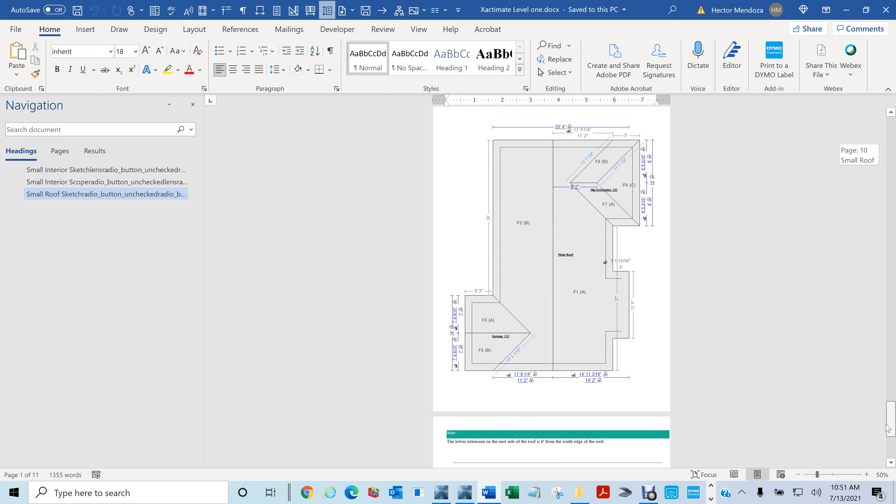when you're reading the documentation on how to do this, you're going to have this thing that looks like this. It's going to tell you what you need to do. Okay. It'll tell you to complete blah blah blah. It's going to tell you here's the initial main roof.

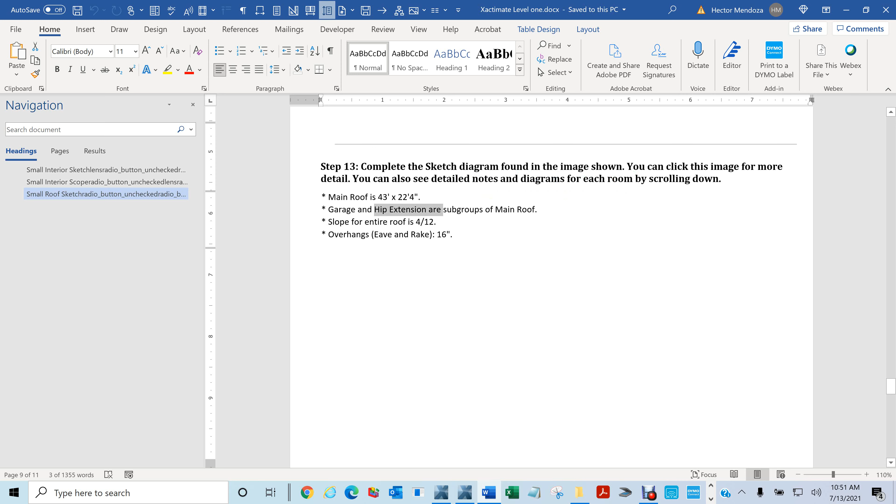It tells you that all the extensions and on your hips and your gables are all... it says that the garage and hip extensions are subgroups. It talks about all your slopes are 4/12 and your overhangs and eaves are 16. Okay, so now, let me show you.

So you're gonna go in and, I'll be slower because I'm not used to using pull downs, so I always have to find this stuff, which is probably gonna help you too. So go to Roof, go to Gable, and by the way, Tommy is not using pull downs; he's using commands. So just to let y'all know, I'm gonna hit tab 4 times to rotate this.

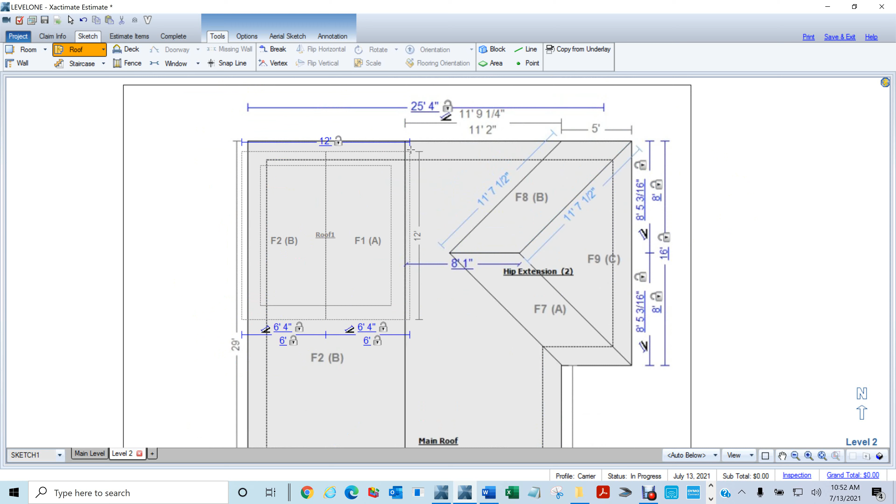Okay, so I'm going to place. Now you don't have an underlayment. I'm using this for training purposes. Okay, so I'm going to just lay that right there, and I'm going to move this guy over till somewhere around 22. I'm not even trying to measure right now, and then move this guy to about, let's say, 43.

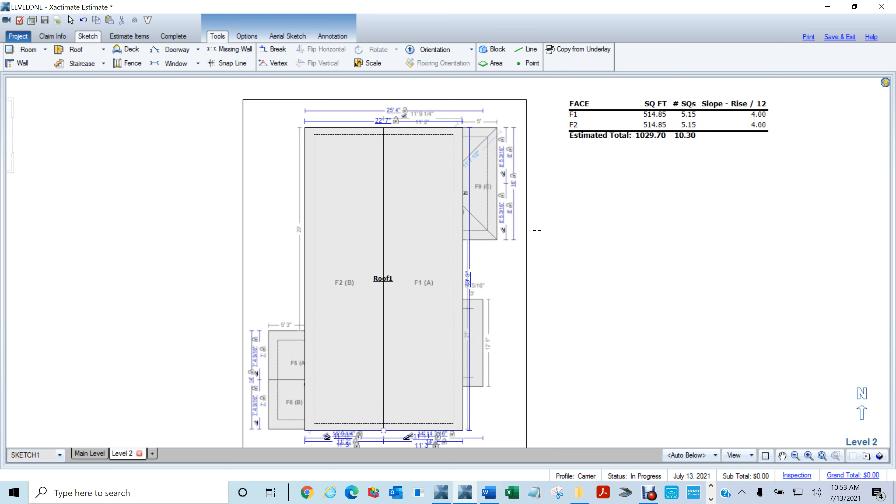Okay. And you can't see it because the monitor's small. But now look. So I'm going to remove the underlayment so you can see what I'm doing. So I'm going to remove the underlayment for a second. I'm going to click where it says Roof. I click it to select this roof, right? I'm going to click here so that I can change this area here.

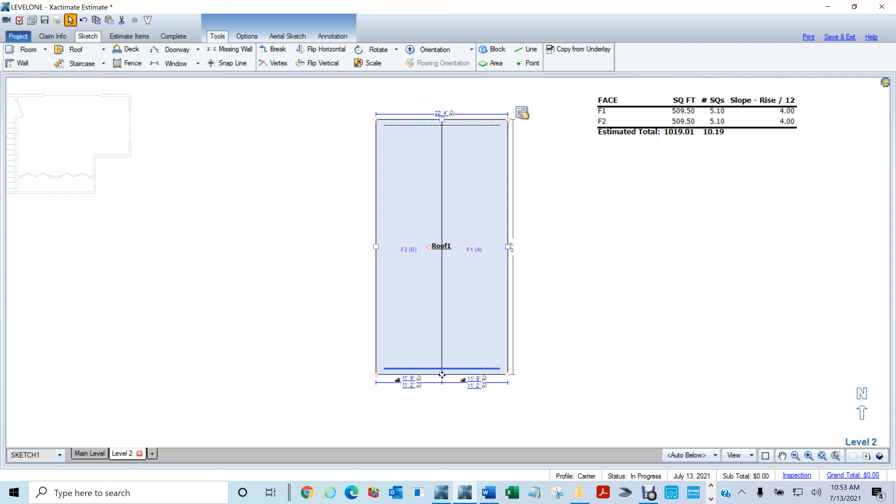So it says that we want this to be 22,4, which is 22 feet 4. Okay, then the next thing we need to do, I'm going to click on this box right here, the anchor point, right? And then I'm going to go up here and change this to 43. I'm going to hit enter. Okay, so now I'm going to bring my underlayment back to see how close we are.

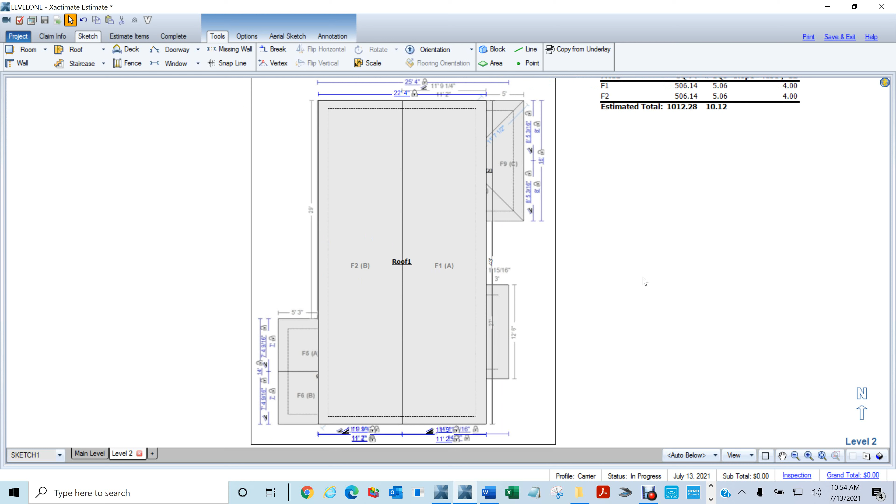And we're real close. Okay, and this is just so that I can show you instead of me opening up a bunch of documents. And I could always do this, hit my Shift O to see what's going on in the background. Okay, so now, remember, if you've seen some of my other videos, the one prior to this is not really important, guys. I'm just showing you to prepare for level 2 and level 3 certification.

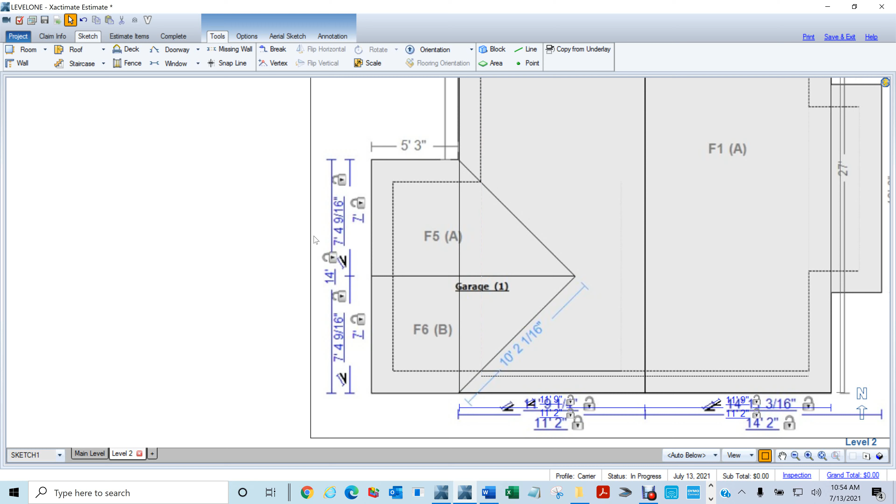On this one, it doesn't matter what facets. This is a facet, this is a facet, this is a facet, and so on. It doesn't matter the name and number of the facets because we're not going to be tested on that. But just to show you, somehow whoever drew this, they accidentally or intentionally went and created a gable. What they did, they clicked on gable, they clicked it aside, right? And just left it there.

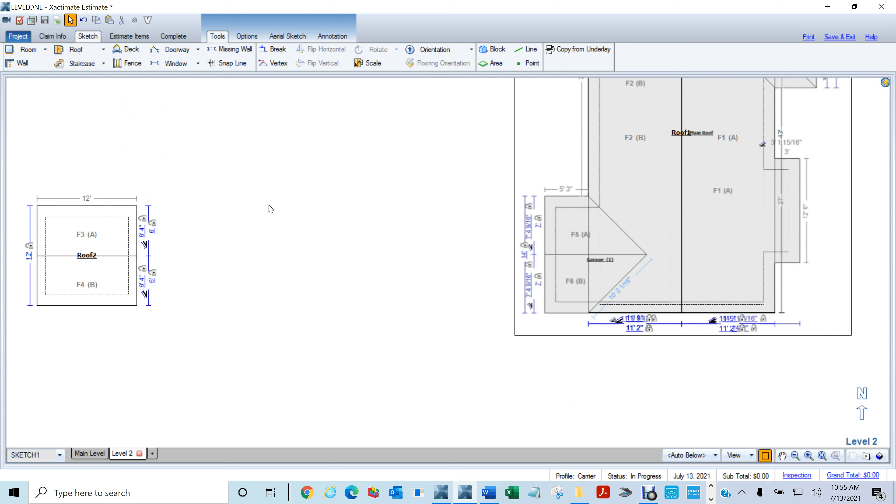Because look, you see right here, facet 3 and facet 4. If yours looks similar to this, this one could be 4 and this one could be 5 and so on. So remember, I'm just showing you, just pay attention to what you're doing. Now, since I've already got 3 and 4 here, when I come down here to create this gable, watch this. I'm going to hit my break tool right here.

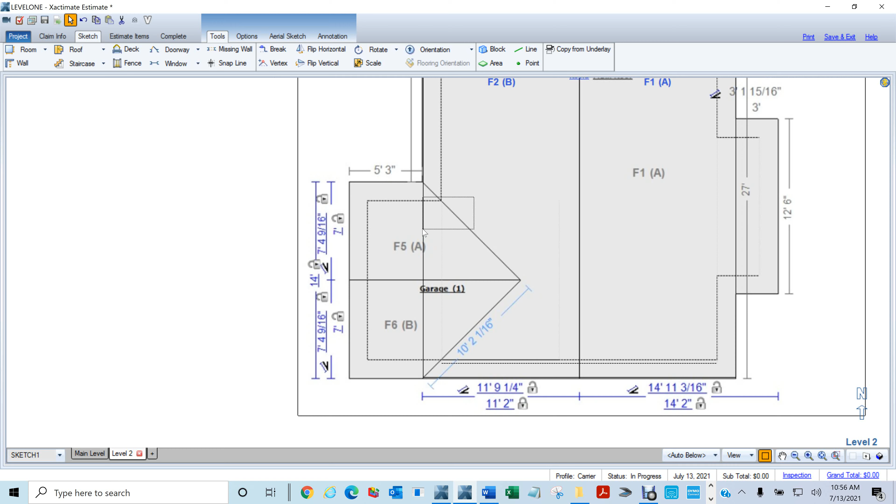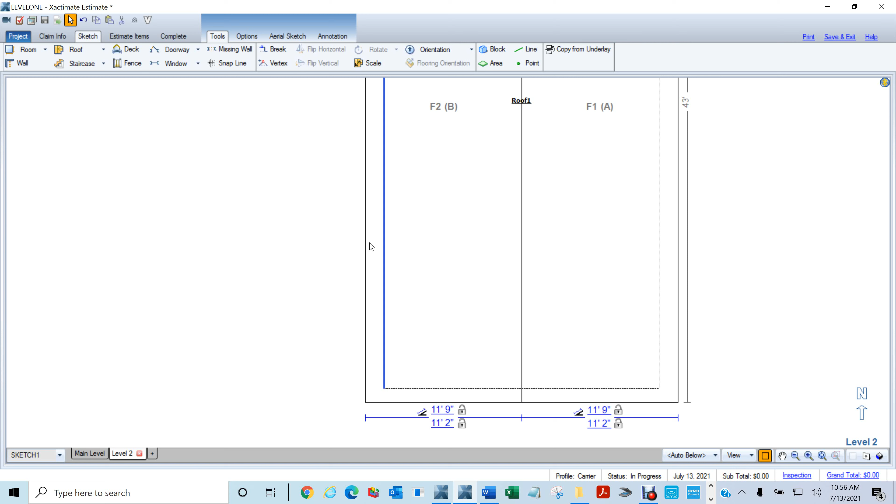Okay. One thing I wasn't thinking was that y'all don't have an underlayment. So it's real easy for me to do that, right? So watch this. Remember, from here to here, you want to get close to a 14. So let me show you how you would do it without an underlayment. I'm going to hit my break tool. Now look at this number at the bottom. I'm going to go up until I get close to 14. Now you don't have to get it exactly.

You got it. Wow, man. Tommy, he's already created things faster than what I'm teaching y'all. He started at the same time as me, but I'm talking, he's not. Good job, Tommy. Let's see if it's right. Oh, that's it. I've been checking everything. Looks right? Yeah, it looks perfect. Oh man, real good, real good.

Okay, now check this out, guys. I'm going to go close to 14, just get close to 14. And then if you look at your document, I don't know if you printed it or however you did, look at this number right here, 5-3, right? Remember, that's why I do it this way so we don't have to go back and forth. But I want to show you if you didn't have an underlayment.

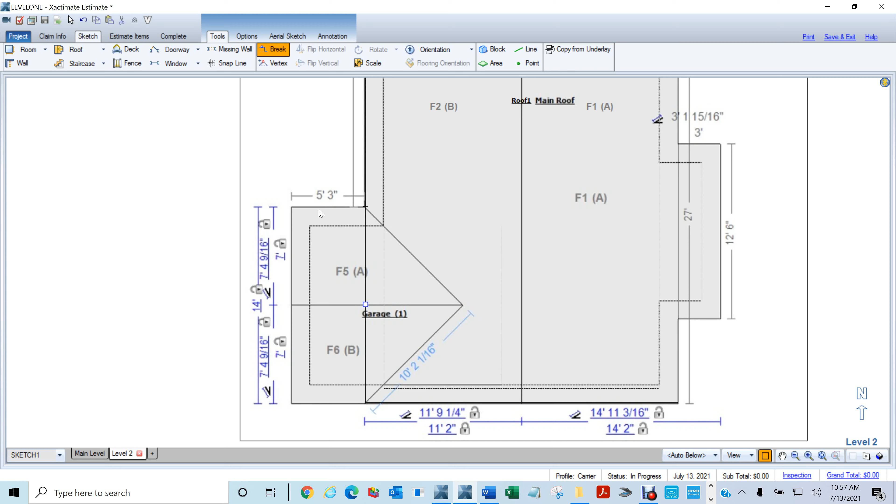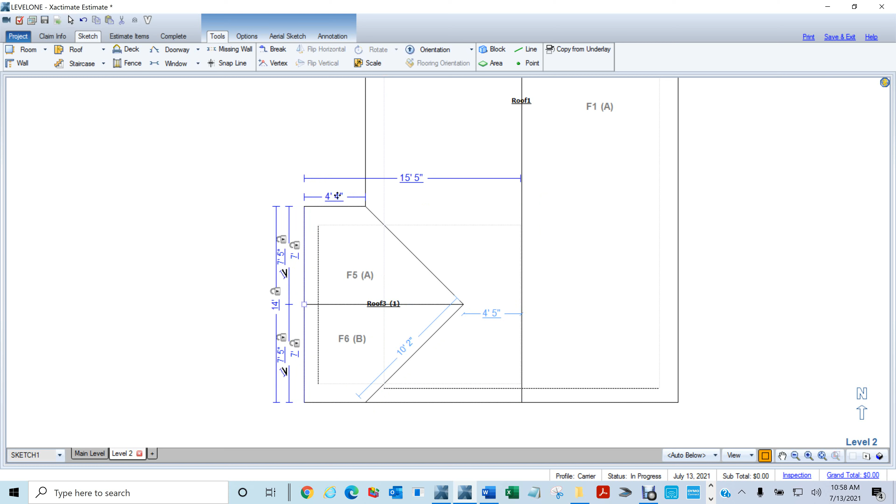Okay, so I already hit the break tool here. I'm going to hit my control key so I can create a gable right here. I'm going to move it until I see this. Oh man, I was trying to point it out to you. I'm going to move this over till I get close to 5. So I changed that to a 5. It did that to me because I was moving this stuff around.

Okay. Now, before we go in too far, let's go ahead and do something. If you're looking at your printout or you're going into Xactimate, you're going to notice that this is called the main roof. So we're going to click here. We're going to call it main roof. Another thing, if you look at the documentation, it's going to tell you that your overhang and your rakes are both 16. So we're going to go ahead and change that.

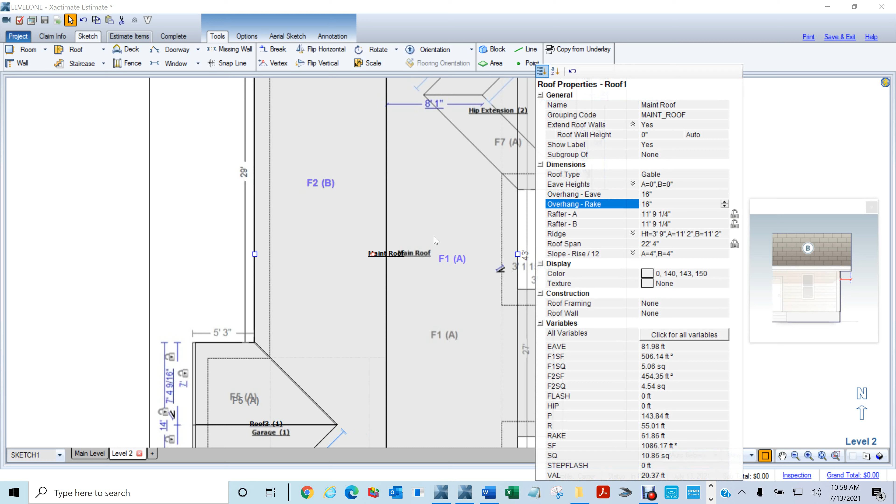So now, oh, you know what? This is supposed to be 5.3. Okay, 5, 3. So we're going to go back to this roof, and this is going to be called garage, just garage. Okay, now while you're here, you might as well change your overhang eaves. You see, if I click here, it changes this right.

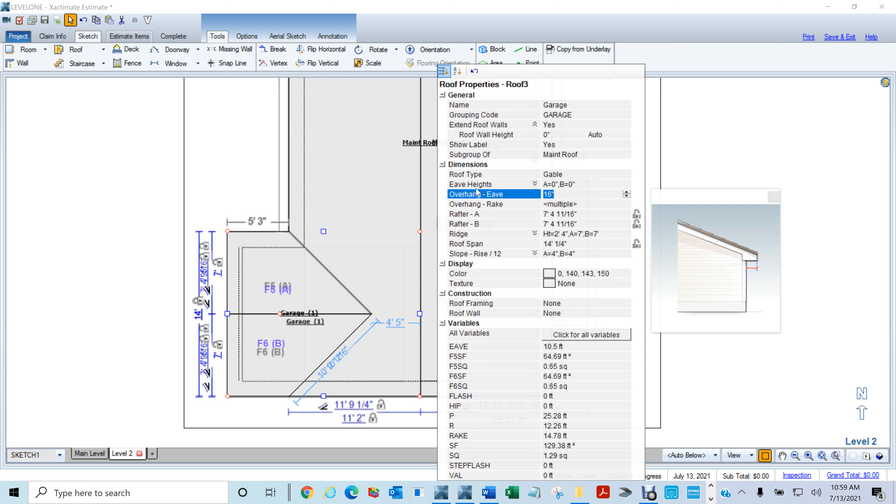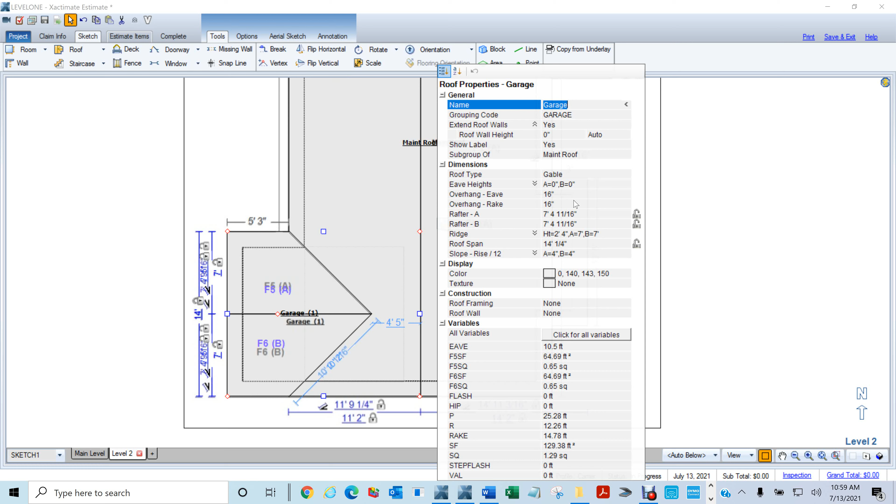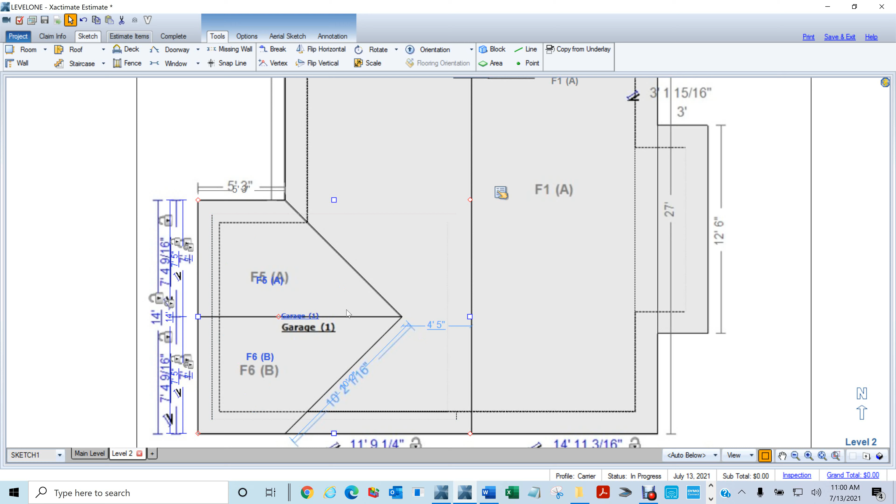And now, you see, we're looking at our underlayment. And yours, you see this line and this line are not the same. That's what we're changing when we're changing the overhangs, right? So I'm going to go back. I'm going to change it to 16 tab 16 enter. Okay. I just wanted to show y'all that.

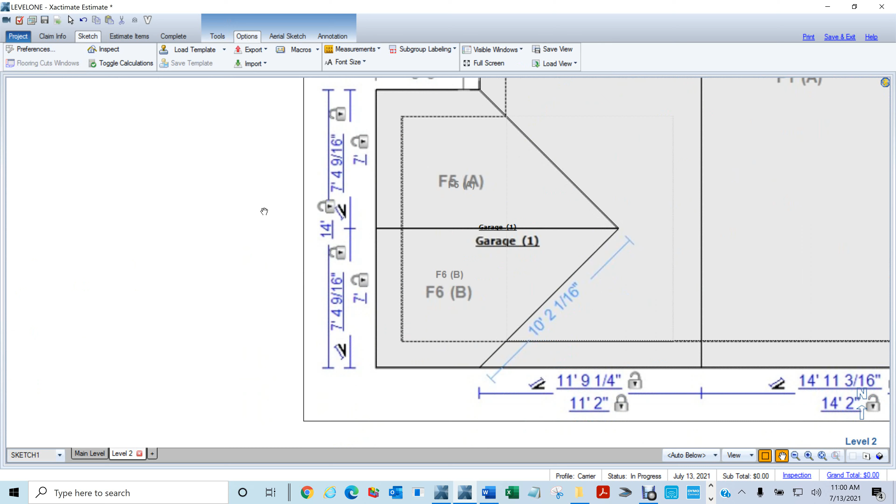Now we've already changed that to 5.3, and we're going to change that to 4.14. Now let me show y'all something. One thing that you really need to do is go to measurements. You see right here where it says 1 inch and 1 inch? Let me show y'all something. So let me turn this off.

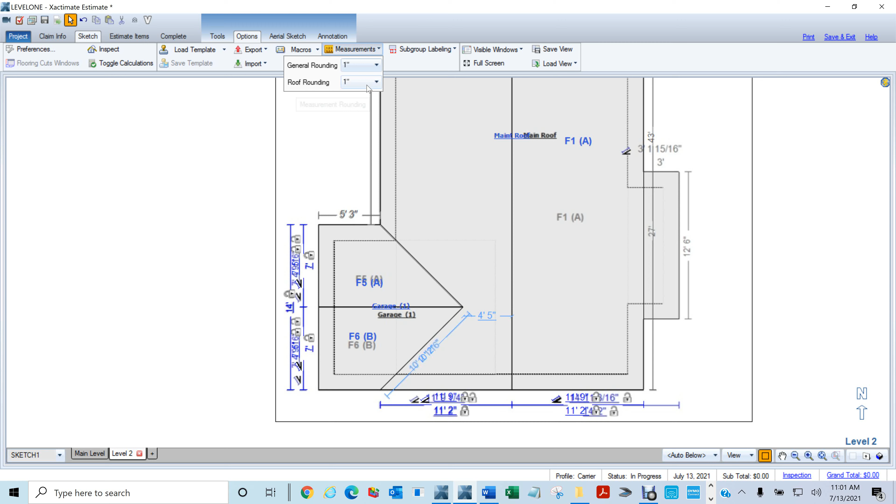So look at the underlayment. It says 7 feet, 4 and 9/16 of an inch. Down here it says 14. You got 14, that's correct, right? But yours says 7.5. So here's the thing. You need to come in here. You see where it says roof rounding? Change that to 1/16. Now you'll notice that your numbers change.

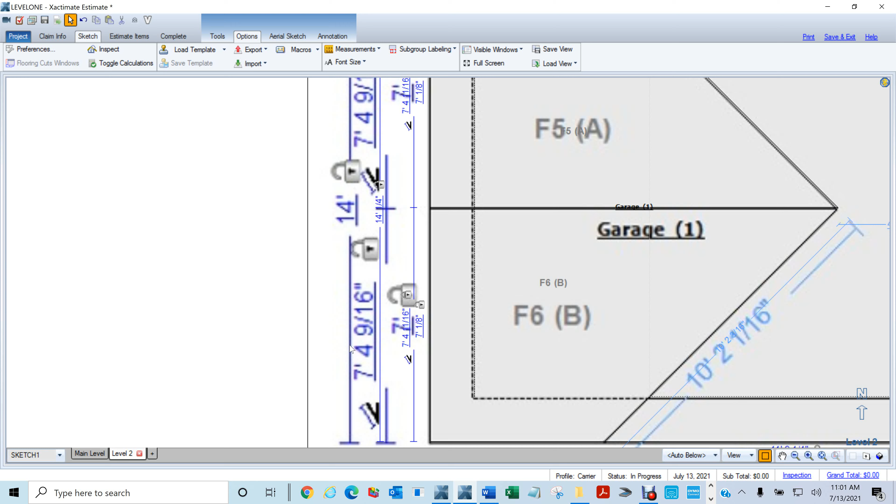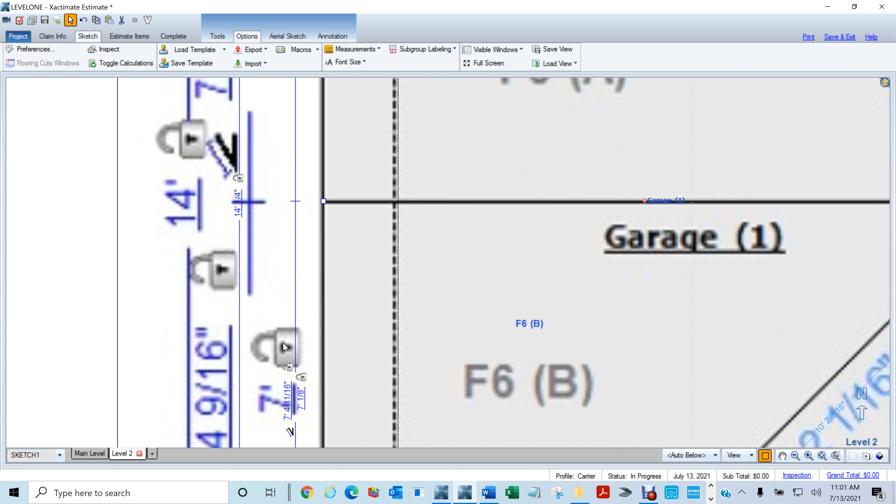See, now you got 7 feet, 4 inches, and 11/16. And there's a 9/16. So let me see what's going on here. If I click here, change that to a 4. So now look, I could change that number. You see right here, it says 7 1/8. I'm going to click here. I'm going to change that to just a 7. So if I hit a 7, enter.

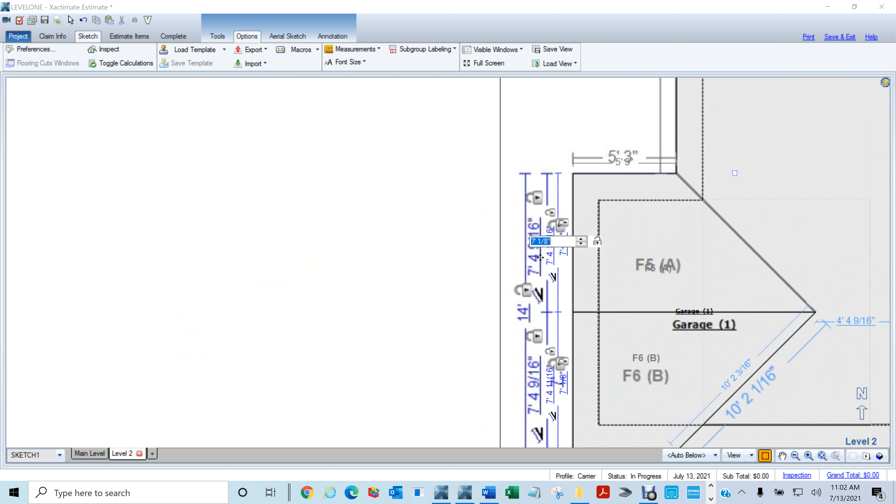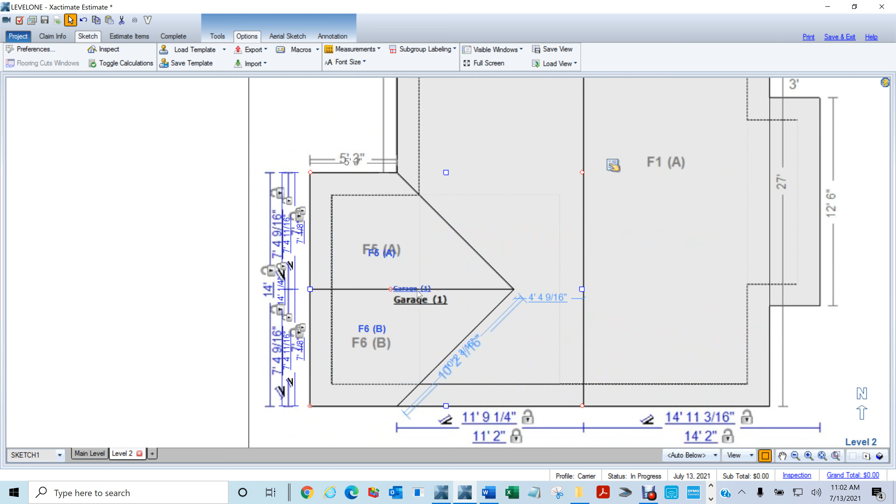Give me a second here. Yeah, it's not going to let me. So if I change this one to, okay, never mind. Okay, so all those numbers are different because remember, I changed this to 16, right?

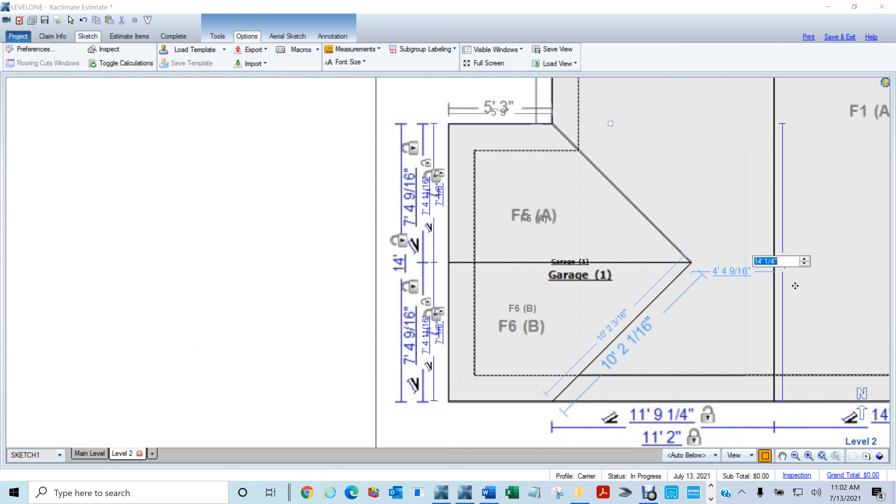Now, remember, you see this 14 1/4 should say 14. So if I go in here, click here, and change, you're going to see it down here. Look, when I click on that 14, it says 14 1/4. And if I just say 14, enter, now all my numbers are going to be the same. So check this out. Now we got 7 feet, 4 and 9/16. And that's exactly what they have here. 7 feet, 4 and 9/16 of an inch.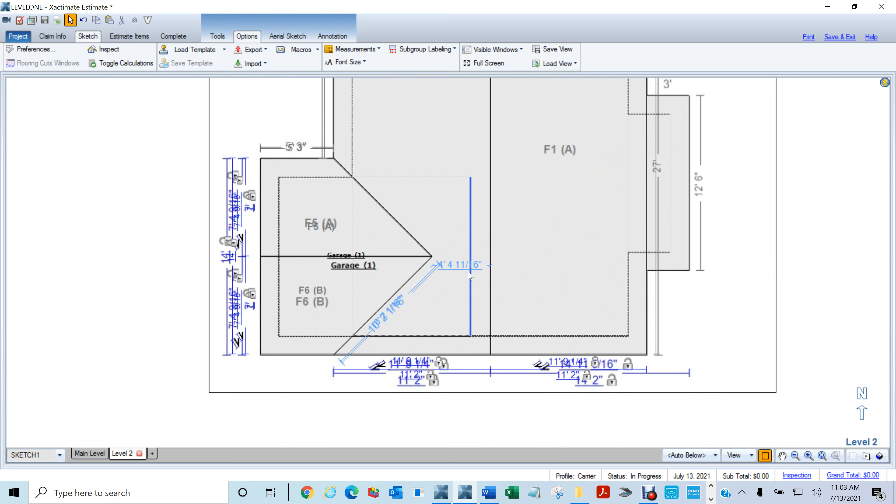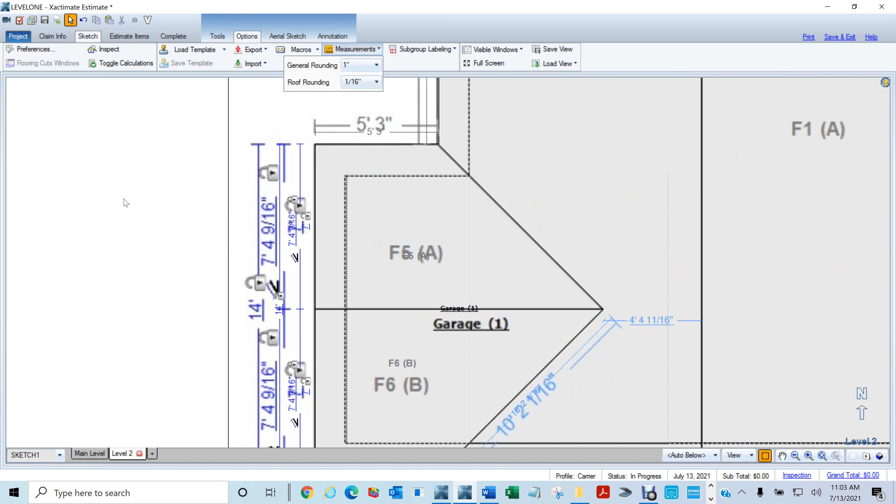And you see that 14, it's right there. Now if you select it, it throws it sometimes on this other side, but this time it didn't. Okay, cool. Now, if you wanted to get it exactly, you got to go in here and change this roof rounding to 1/16 of an inch. So now when we come down here, those numbers are good. 11 feet 2 inches, 11 feet 2 inches.

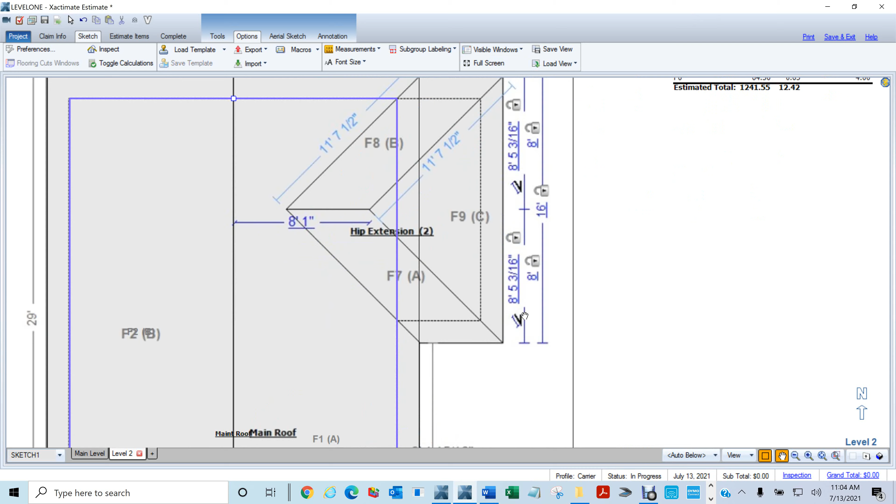Okay, so now the next thing you would want to do is go in here and, we already did 16, good. So we're done here. Let's go to this other side. I'm going to enlarge this down here again. Remember, you're not going to have an underlayment, but I don't know if you printed your instructions out or if you're looking at them on another screen,

you're going to notice that this gable right here, which is a hip extension, is 16 feet. So let's turn this off. Not just that, but here, it's 16 feet, and from here to here is 5 feet, right? So now, remember, you hit your break tool. Excuse me, let me write this down because I get excited. I'm thinking about 4 things while I'm trying to show y'all. So we have 16 and we got 5.

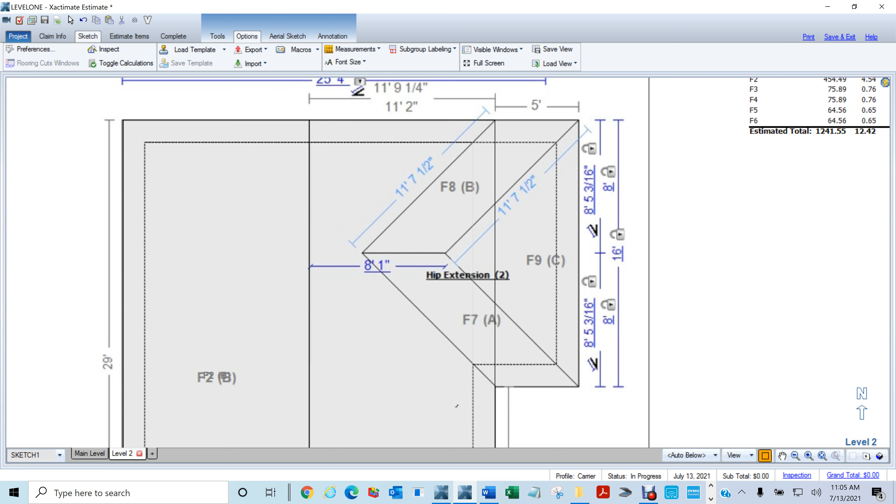Okay, so let's take the underlayment off. I'm gonna hit my break tool right here and look at that number, right? I want that to be 16.

16, right? I'm gonna click. I'm gonna hold my control key to create that extension. So I'm gonna left click and drag and look at that number on the top. I want that to be about 5 feet. I'm gonna release it.

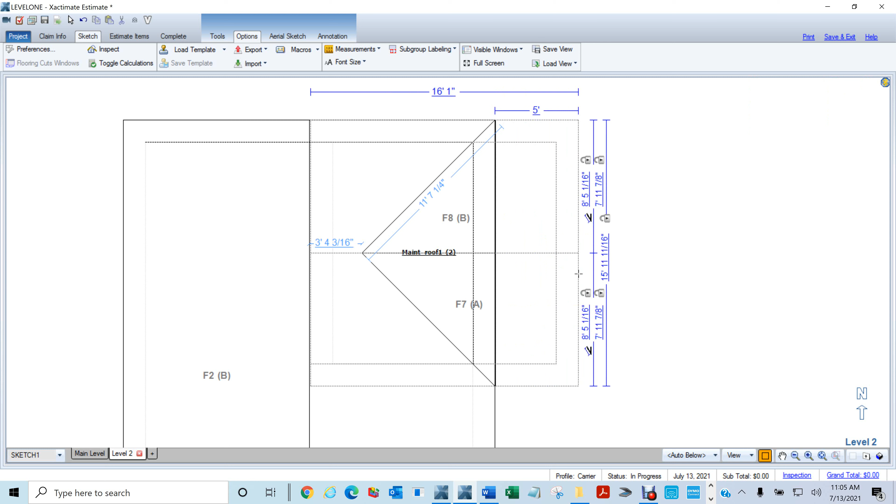Now, so it looks like this number is 5, but in reality it's probably not, because if I click there, you see it's 5 feet 1 inch. That's why I asked y'all to come in here and change this thing. So I'm going to click here. Oops, excuse me. I'm going to click here, change that to a 5. Hit enter. Now it's a real 5.

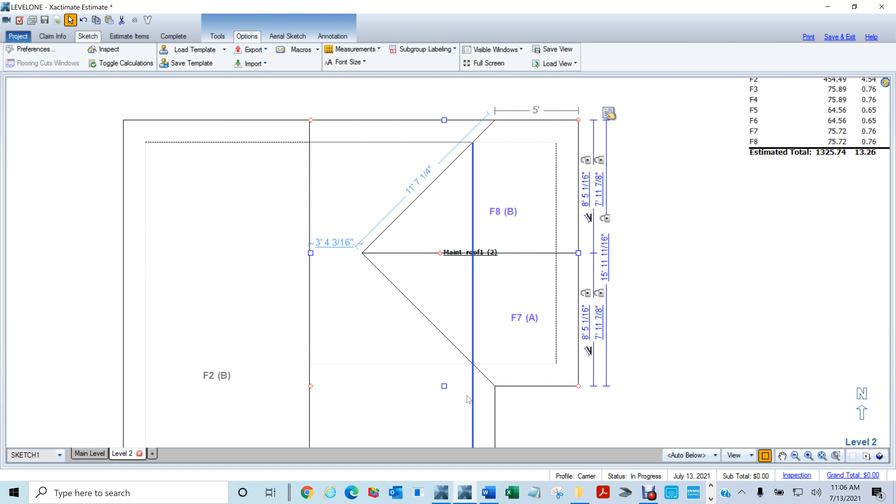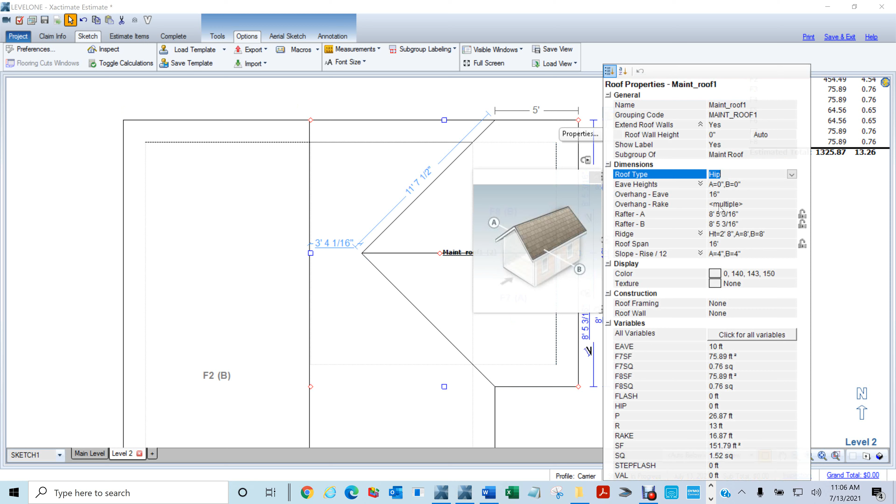And remember earlier when I clicked down here and I moved it to 16, it's not 16. It's 16.1. But now if I click here and I hit 16, now it's 16. Now while I'm here, I need to change this into a hip, right? And while you're there, remember you have your overhangs. 16. Okay, so now your overhang, it says multiple. You're going to delete it and hit 16, enter.

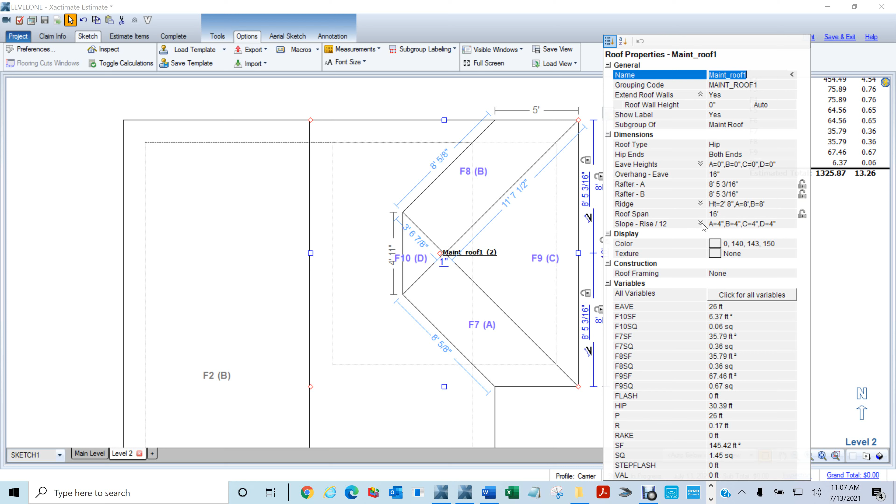So now you're looking at it, you should look like this. And make sure here, so go here and make sure that you have that it is still 4 pitch, which is your slope riser. Make sure that it's all 4, because remember they told you everything has to be 4. Now you can click here. You see this little line right here? Look at the problem we have here. You see, this is what it should be, like that, right? But right now yours looks like this, hopefully.

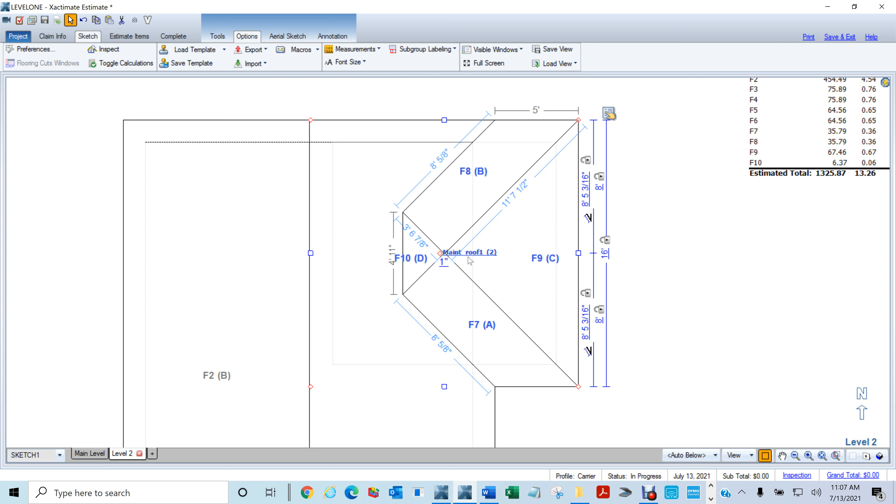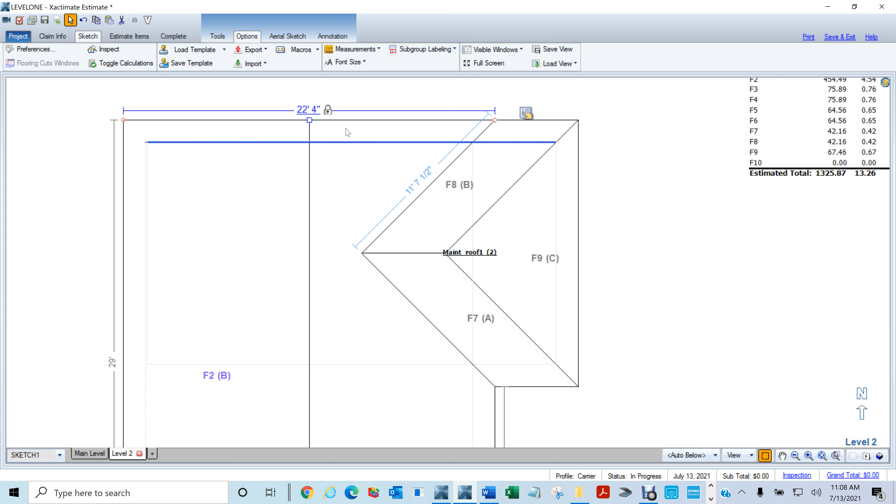Now I'm going to click here. You see this little line here? What I do is I take this all the way to the end and snap to that. Now look at this number right on the top. You're going to see this line. You see that 11.2? That tells you that you're snapping to that. Especially since this thing now says 22.4. Okay, so

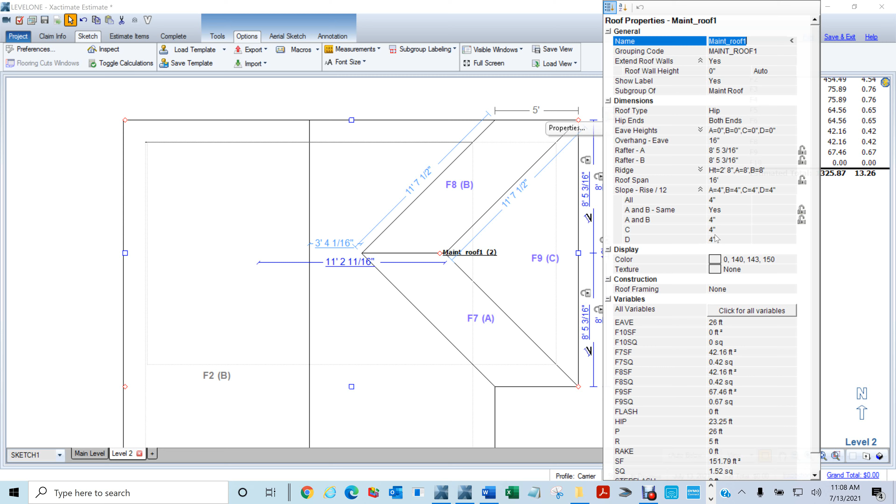now let's see if we have everything. We're going to go here. We have the eave, excuse me, the overhangs are 16. There's four 12ths. Now, if I hit my underlayment, let's see if all the numbers are right. So if I click here, you see 5, 5, right? Let's go and enlarge this area. 16 and 16, 8 and 8, 8, 5 and 3, 16, 8, 5 and 3, 16.

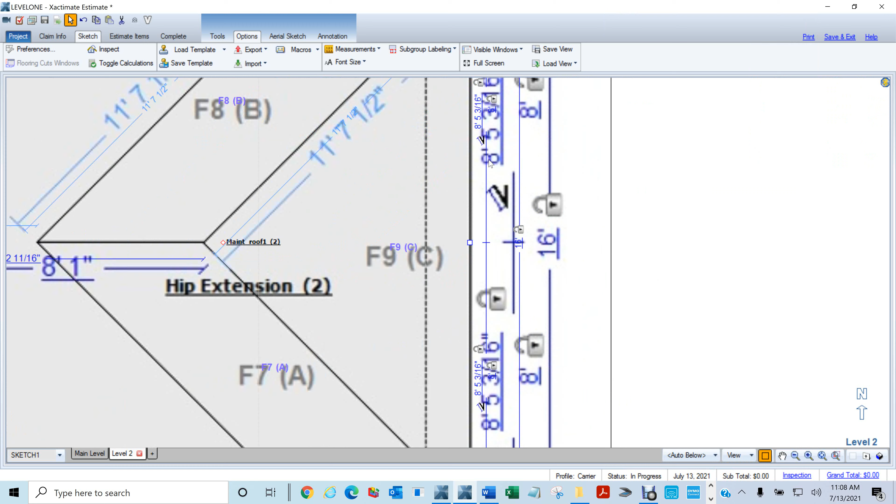So everything's perfect, okay? And you want to try to make everything as perfect as possible. That way, when you're doing your estimates, it's gonna be perfect. You want to try to score 100 if you can.

That's my achievement always. I always try to score 100 on my test. I don't. I usually get 98, 97, but I get close. I've made a couple of hundreds.

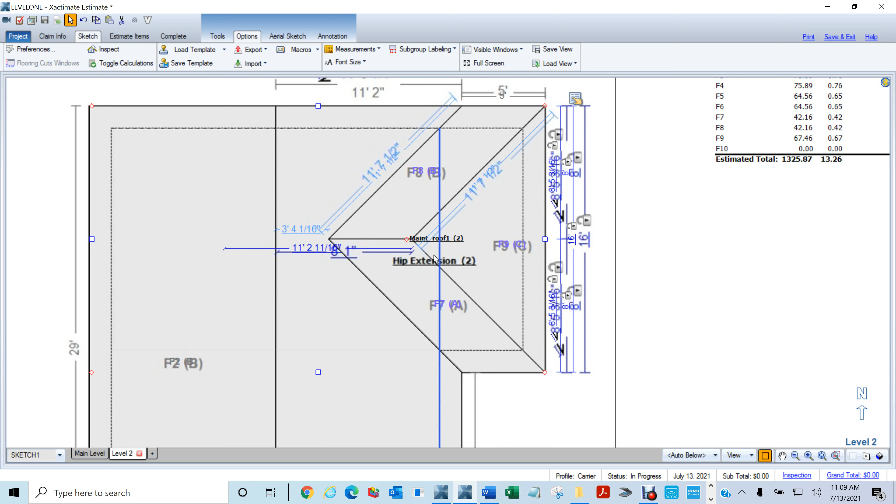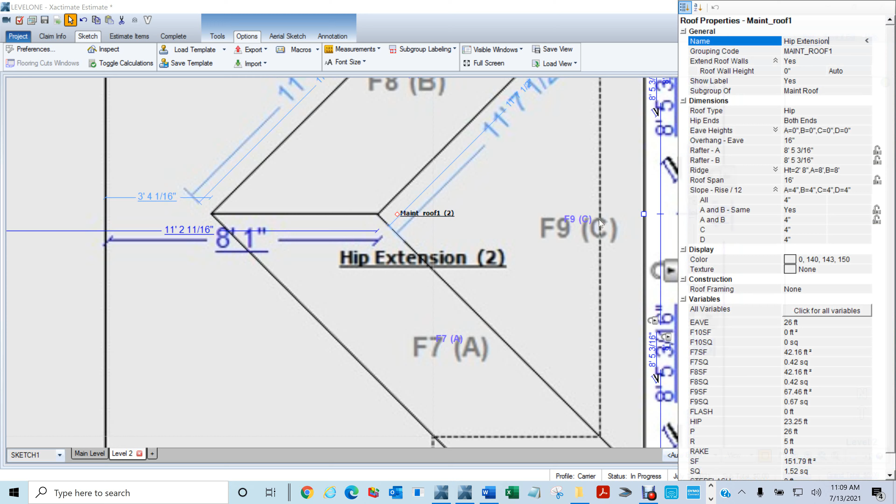So let's go ahead and change this name right now. It says mate roof. Sounds like I must have misspelled the first one because this is taken. I put a T at the end. We'll fix that. So let's double click here. We're going to change this to Hip Extension. Enter. Okay. Right here, I must have, yep, you see it, I misspelled it. Me and my excitement. I'm going to go and hit main roof. Okay. This wouldn't have failed you just because you misspelled it. Nobody's ever going to see this stuff.

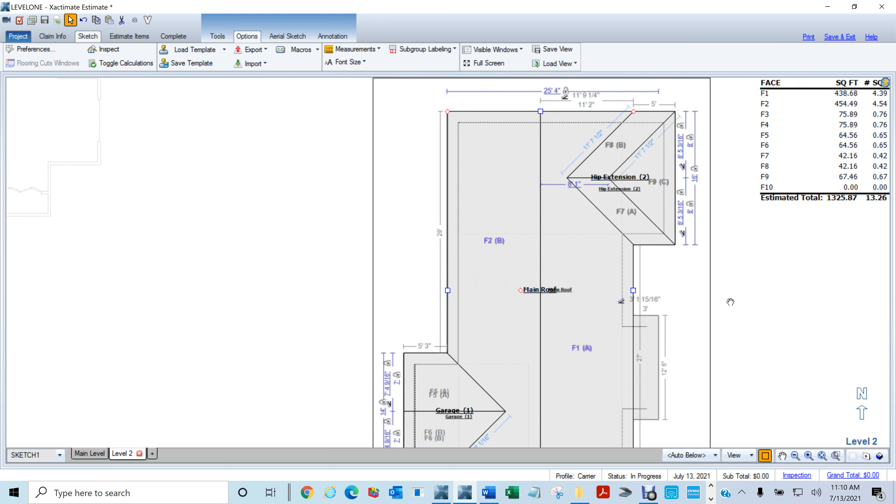Okay, so here's one thing that I didn't explain to y'all, and I changed it because I don't even have to think about what I'm doing, so I don't explain all my stuff. So watch this. You see, I have this little extension here, right? Now watch this. If I hit my break tool, look what's going to happen. I hit my break tool and I click here, move it down, and I try to move it over. Look, you see that little thing? You see, it's not letting me move it.

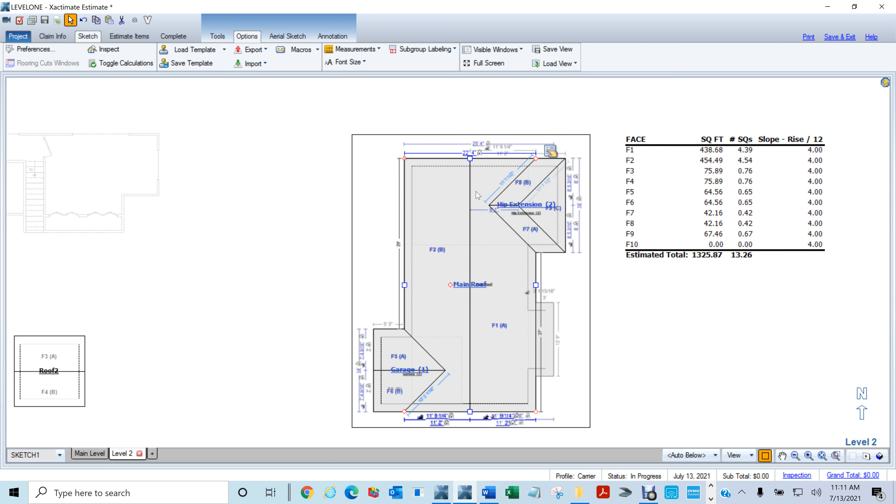So this is what happens. You draw your main roof, right? And when you put this extension here and this extension here, what happens is Xactimate locks this so that you don't mess this up. So let me turn off my underlay. You see right in here, if you notice, you're going to have a lock. That thing is locked.

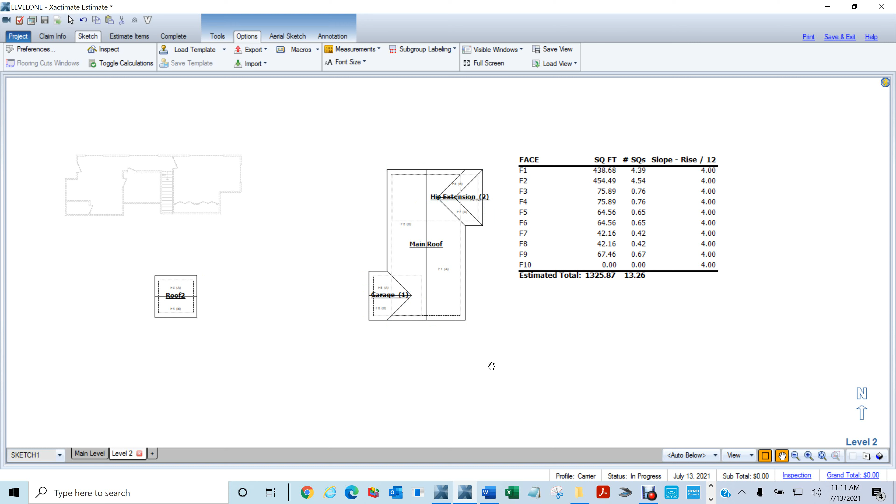So what you do is you click on that lock, another one appears, you click it, watch it open up. Now that is locked. Okay, so now let me show you something. There's one more lock that you're going to have to lock, and let me explain why. Okay, so if I go in here, I'm going to put my underlayment so you can see what's going on. You see right now, everything is aligned right here.

So if I went in here, hit my break tool, and selected the area that I want to extend, look at this right here. When I click and go to the right, you see your ridge is moving. So what you need to do is, let me turn off the underlayment so yours will look like mine. So if I click here, you see this lock right here, this bottom one.

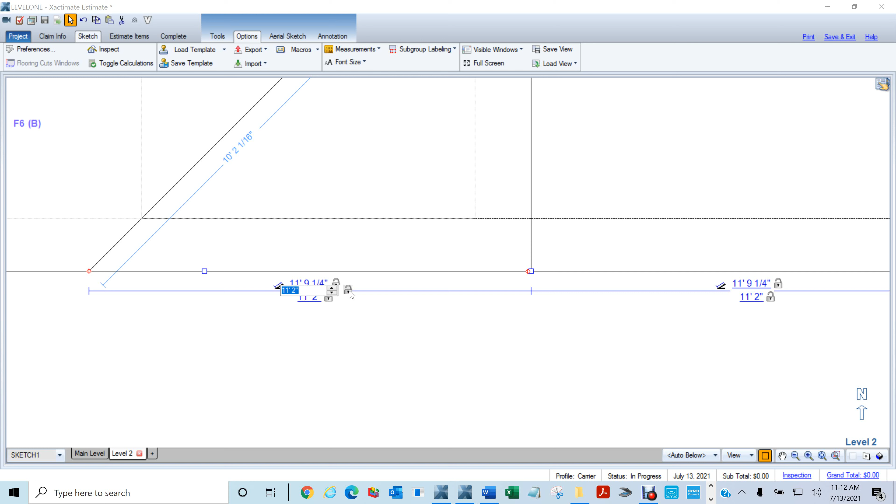And I'm not going to go over all the others. Just remember this one right here, okay? I've got to explain about all those other ones, and I have other videos for that. But for your test, don't forget to lock that. You see, I hit that. I have another lock here, right? You click that one, and then it's locked. Okay, so you've got to take those two steps.

So now let's put the underlayment back. And remember, every time I'm taking this underlayment, you're not doing it because you don't have an underlayment here. Okay, so I'm going to hit my B for break. I'm going to click here, right? I'm going to go down. I'm going to release it. I messed up. Maybe not. No, I didn't. Okay, so I'm going to click here and just move this over.

You see, nothing happened. Nothing's happening to that ridge in the middle because we have it locked for the left side. You're going to release it. You're going to click here and you're going to change this into a three. Or remember guys, do not go by my numbers because yours are going to be different.

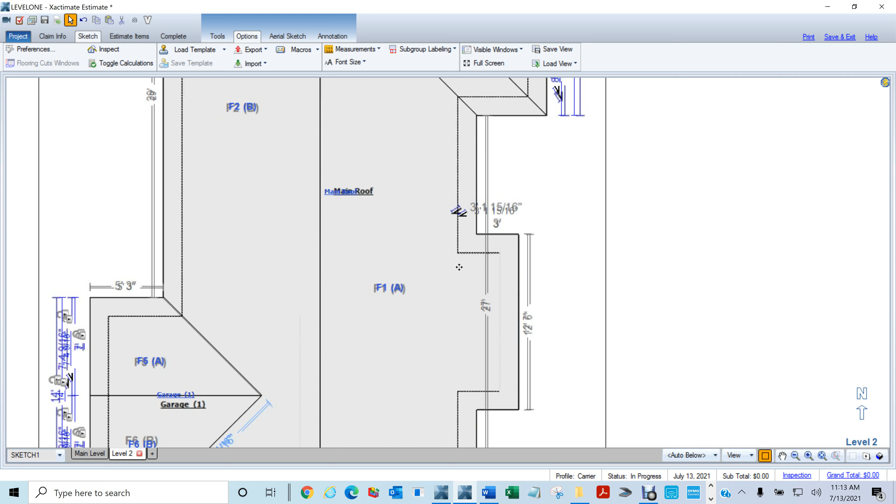So, every single one of them was different. And I tried to tell them, I said, look, guys, y'all can do whatever you want, but do not do it that way. And every single one of them failed it. So just because yours looks like mine, do not use it. You've got to use your information, not this information that I'm showing you here. Okay, so it looks like we're actually done with this certification.

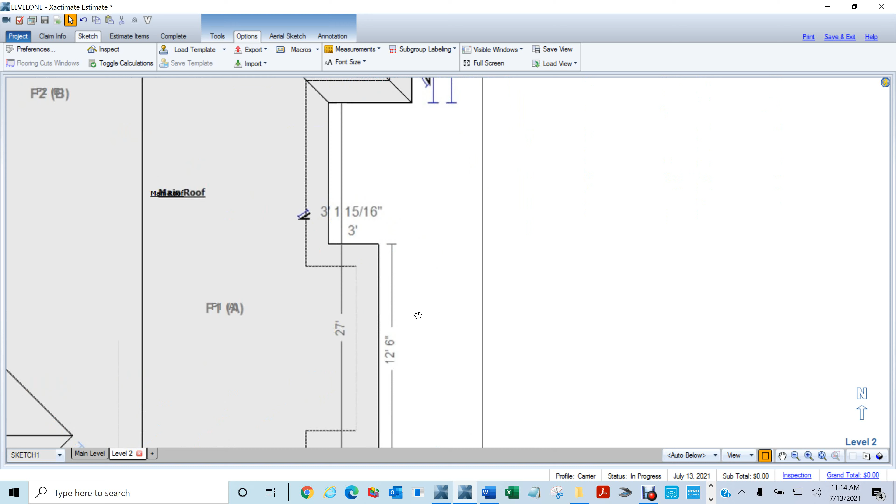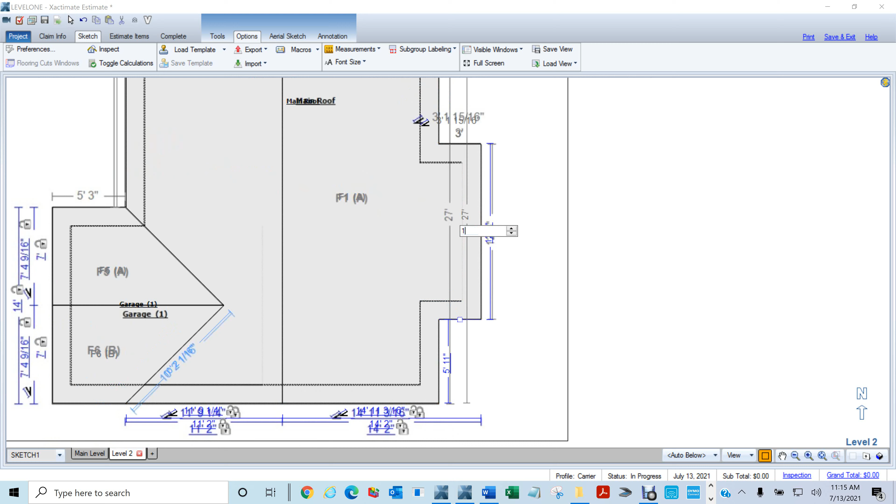So no, there is one more number we forgot to do. You see right here, we got 12.7, and this is 12.6, right? So I'm going to click on it. Okay, my machine is doing an autosave. Okay, so you see this little block here? If you click here and change this to 12.6, now I guarantee you, if you follow those steps that I showed you, you would pass this certification.

Well, there's more to it than this. Remember, you have your room drawings. Then they're going to ask you a bunch of questions, and I'll go over some of those questions when Tommy starts getting into that area. I'm not going to give you the answers because it's not fair to everybody else. But I will give y'all some. I'm going to change the wording a little bit, and that way you know what you're going to get into.

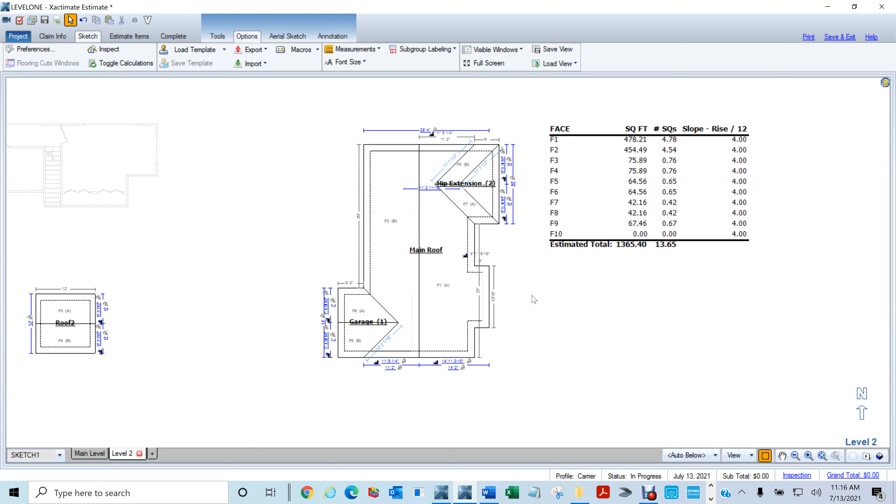So now this is what yours is probably going to look like, just like this.